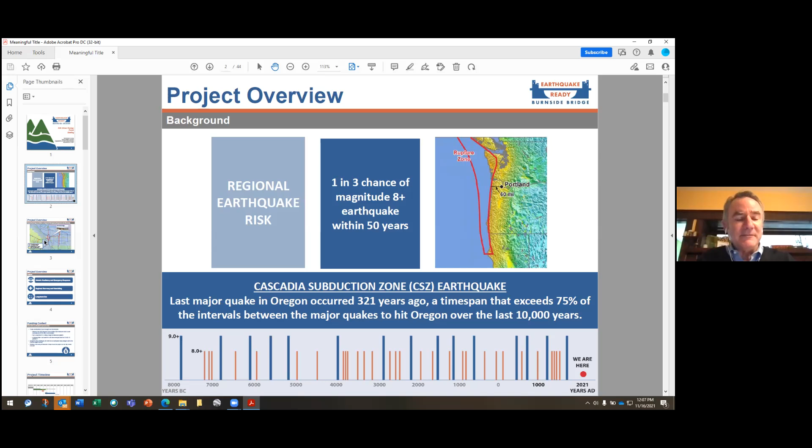If you think about Burnside, the road, not just the bridge, it starts all the way in Gresham, and then it's one of the few roads that connects to a Willamette River Bridge that goes over the hills. So if you follow it west, you'll eventually get to Washington County, where it becomes Barnes Road. So lifeline roads are typically really long roads that we can rely on in a big earthquake.

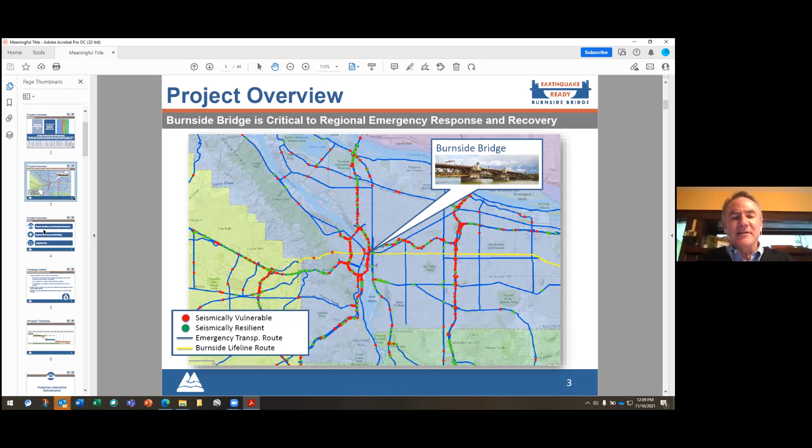So as the county finished replacing our previously most structurally deficient bridge, the Sellwood, we sort of pivoted to our 4 downtown bridges, and with the county commissioners' support, decided to take on Burnside because it's on a lifeline route and make it the next bridge that we can say is earthquake ready.

Next slide, please. So 3 main purposes of the project. The day of the big earthquake, we want the Burnside Bridge to be usable that day when the shaking stops. So some people ask, oh, what about the Tilikum Crossing? And it's true that the Tilikum Crossing bridge structure is built to be in use after a big earthquake. Unfortunately, the approaches to that bridge, TriMet needed to find some cost savings when they were funding the Orange Line, and they are expecting some settlement of the roads that approach the bridge, which are built on formerly kind of marshy land. So it might be weeks before the Tilikum is back in business after a big earthquake, and then it has freeway ramps above the MAX tracks as you get over to the west side around River Place.

After that big earthquake, we want to have a bridge that can help our region recover and rebuild. And I oftentimes use the New Orleans comparison after Hurricane Katrina for this point. The region around New Orleans lost about 1/3 of its jobs, about 1/3 of its residents after Katrina. And I think it's just around now starting to get back to its former population. So we don't want to have that happen to Portland in our region.

The last point there is sort of the one I mentioned earlier. If we're fortunate and the earthquake happens long after we're all dead and gone, which it could, we also want to make sure that we have a Burnside Bridge that is going to last another 100 years. The current bridge, even though we've done some maintenance on it in recent years, is not going to last another 100 years on its own. So we think it's a prime candidate for a major investment. Next slide, please.

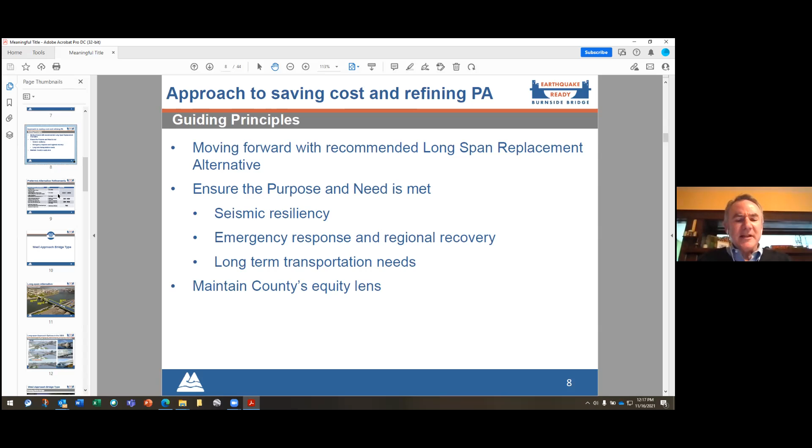We have been asked, why are you building a bridge that we have to stop for so a ship can pass? We did look at one that would be high enough that ships could go underneath it, but we were told by the Coast Guard it would have to be so tall that you'd enter the bridge around 10th Avenue on either side, sort of like around Powell's Books. So Steve will be walking you through some of those issues on those two structure types.

The big one above, these are cost savings projected from $140 to $165 million. That comes from narrowing the width of the bridge. If you think about it, it's pretty logical. You can't really make a bridge shorter in this case. It touches down at MLK on the east, 2nd Avenue on the west. Can't make it shorter, but you can make it narrower.

And we were proposing a bridge that was considerably wider than what's out there today. I think around 26 feet wider, depends on where you take the measurement. So what's on the table now is a bridge that's about as wide as today's bridge, maybe 1 or 2 feet narrower. So Steve will walk you through some of the images of what that could look like.

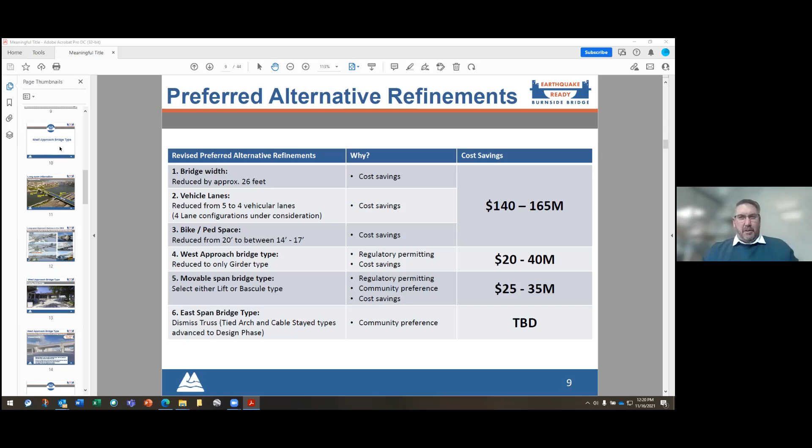And I'm going to work from west to east as we go through the visuals. And when we get to the concepts, the massing models, just remember they are just that, concepts and massing models, to help frame up the kind of bridge types that we're talking about for decisions now versus what's going to be made in the future during final design, of which there's going to be a lot more emphasis put into the urban design and aesthetics. But with that, I'm going to jump right in and, apologetically, I'm going to go fairly quickly so there's plenty of time for Q&A.

So as context, this is our 3 bridges in one graphic. As a reminder, the west approach, 450 feet, ties into downtown. The main movable span, about the same length at 450 feet, which has to provide navigation for vessels. And then a longer 650 foot or more east approach span. And that's what Mike was talking about as being deferred till the final design phase.

As we've been looking at structure types, we've been looking at this family of them. We actually started with more, but narrowed it down to this family. Tied arch, which is, again, classic arch shape, some modern versions on the right-hand side, a cable stay similar to Tilikum, different sort of style, and you can see the graphics of that. And then this girder option on the west approach.

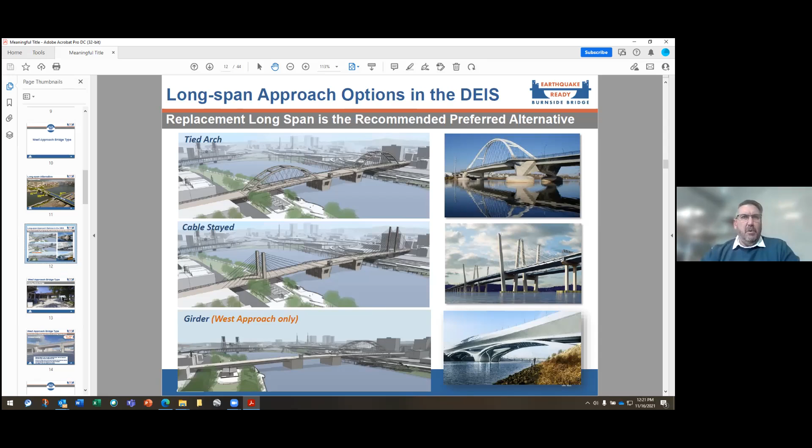And we're going to start with the conversation about what that means and why. And it's particular to the west approach because you don't have the same clearance issues that you have on the east side. So as we move to the west approach, pretty classic picture that most people recognize if you're standing on the south side of the bridge looking to the north in Waterfront Park. And the structure type here is a girder type, built in 1926, fairly deep members for such short spans compared to today's standards, and a whole series of different columns in Waterfront Park.

Well, the response that the project team has, and this was informed by the UDAG, the Urban Design and Aesthetics Working Group, is to replace the girder option with another girder option, thereby preserving the views up above, alignments with the historic district, while having a much longer span and actually gaining vertical clearance so that you can actually provide some opportunities for what could happen in and around the space below.

So this massing model is that, we're showing some haunching into the girders, a lot more work, we'll get into it from an aesthetic standpoint, but the concept of a longer but shallower girder span that preserves the open feel of Waterfront Park, both below and above, is what is going to be progressing forward. And the good news is it saves between $20 and $40 million compared to some of the other above deck superstructure types. So it sort of checks all the boxes.

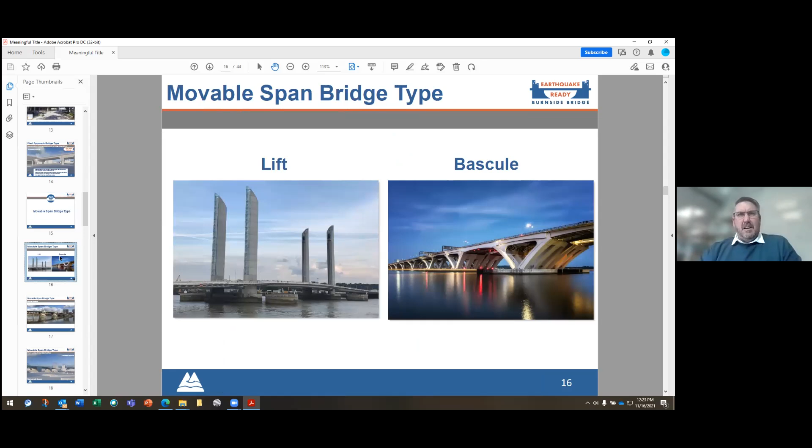When we talk about the movable span, lots of conversations about the movable span, different types, some modern versions of movable span. Left is the lift bridge and the right is the bascule bridge. You've seen different versions of lift and bascule if you just look up and down the river out there right now. But these are two modern versions of those styles. When you think about the existing condition, it is this bascule style, historic bascule style.

And so as we were getting into the conversations with different massing models, we did these combinations of a girder option on the west side, and we'll go through 4 different graphics of what the movable span could be. This again is the bascule option. There's nothing above the deck, so it's just a rotating movable span, and then coupled with a tied arch on the east side.

So as we were looking at this, we said, okay, let's start with this conceptual rendering of the massing model. Then what if we were to replace the bascule span with a lift span where it just raises vertically up? And you can see just in the massing model, the significance of the towers in the river. And those towers are sized appropriately. When you think about what has to be inside of them, it's all the mechanical, electrical equipment, plus the counterweight that fits inside of each one of these towers. So they're not small towers.

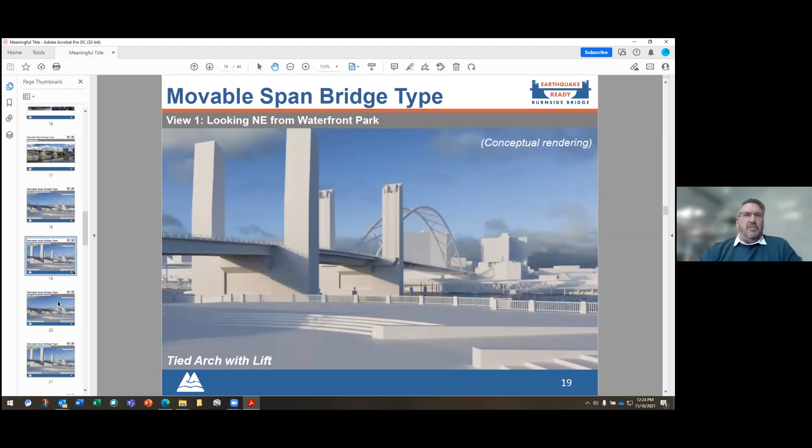And so then we said, okay, let's do the same assessment with the cable stay on the far east side. Again, girder on the west, bascule in the middle, cable stay with or without a different lifting structure. And again, here, from a compatibility standpoint, you at least start to get some similarities with the towers, but still pretty large masses in the middle of the river.

And so as we approach this question, we continue to develop the views for the way this could look. And so we have a couple of different viewpoints with different graphics. This case, it's on the bridge itself. You can see Big Pink, obviously, to the west. So these series of views are going to be exactly like that. So if you were to be on the bridge with tied arch and cable supported with the bascule, you'll see very little above the deck. Whereas when you introduce the lift option, you start seeing the towers.

As we move to a different place, and granted this view, unless you're sitting in the backseat of the car looking backwards, you're not necessarily going to have this view, but it's reminiscent of if you're on the East Bank Esplanade and looking in this direction as well.

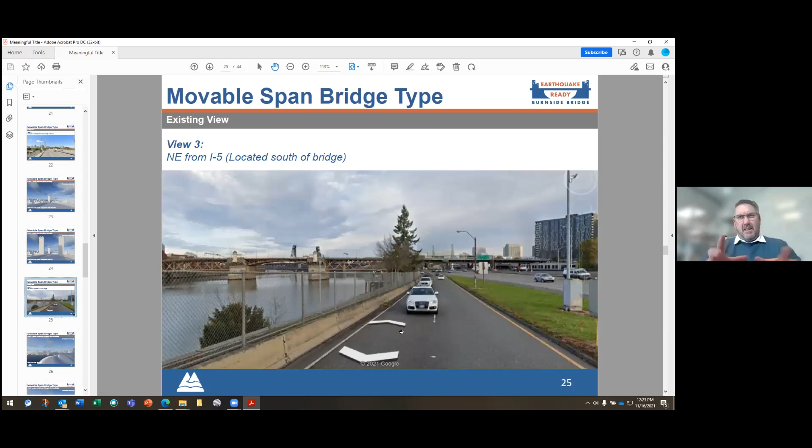So looking north from the south side of the bridge, you would see now this combination of the tied arch with the bascule with a girder option compared to how that might look as you start introducing these vertical elements with the lift. And you can see the difference as you modify the long span on the east approach to something more like a cable stay. And I'll go back and forth to reference the difference between these two.

Some definite differences in terms of the scale and how lightweight the superstructure looks, especially for the long span. Then when you start adding back in the lift option from the movable span, that mass is reintroduced.

We then said, okay, let's get back on the bridge. In this case, you're standing on the west side looking east. This is a classic place where people, you can even see in the Google Earth, standing there to get a picture of the Portland, Oregon sign. And so this is a location that a lot of people will naturally move to.

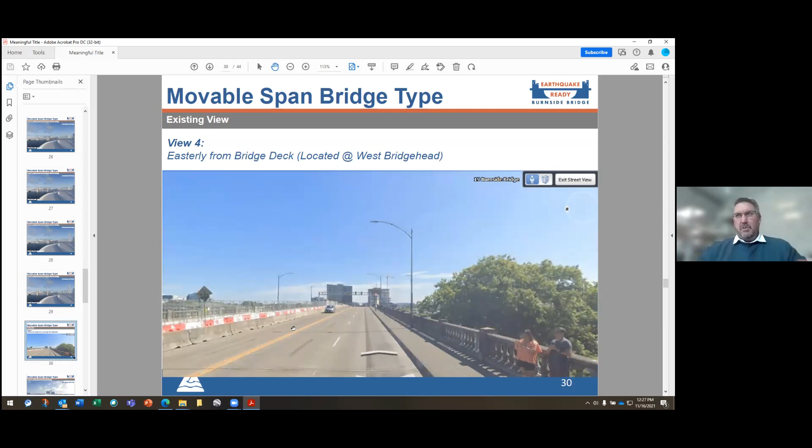And so when you start thinking about the different bridge options, again, bascule with the tied arch in the distance versus the tied arch and the lift, versus the bascule and the cable stay in the distance. Again, the towers get taller, but you don't have that same sort of massing on the outsides, versus the cable stay with the lift.

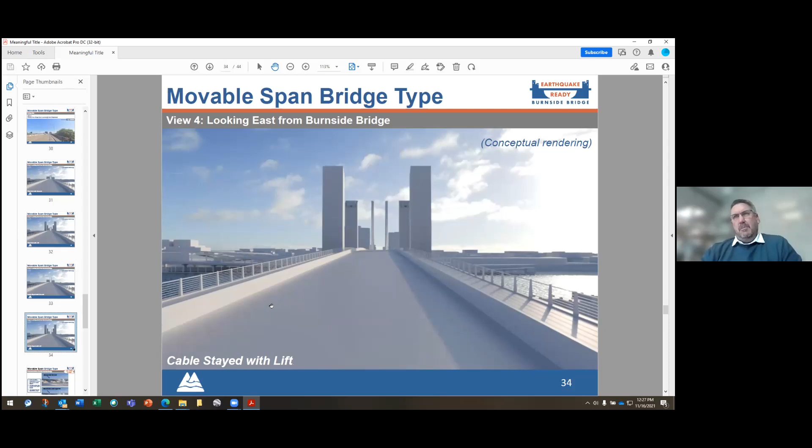So one of the things that we found clearly in all these graphics is the introduction of the lift movable span creates a mass that when we started asking this question to many groups, whether it's the Urban Design and Aesthetics Working Group, permitting agencies, the general public, it was pretty unanimous that, given all of the pros and cons, having a bascule option, that option that doesn't have anything above the deck, made the most sense. From a cost standpoint, it also cost between $25 and $35 million less.

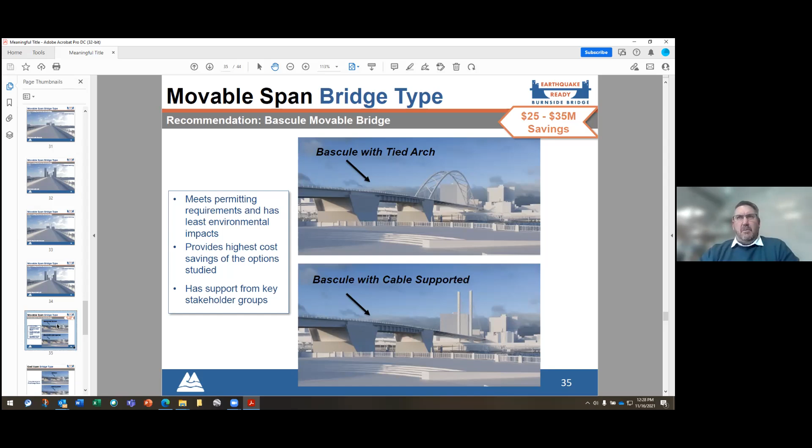So moving forward with this bascule movable bridge in combination with something on the east side to be determined in the final design phase. And this goes back to Mike's point of the complexities and challenges with building, whether it's a tied arch or a cable stay, over the freeway, over the railroad, over the East Bank Esplanade, over the river, is really something that before the county commits to one type or another, wants to get contractor input. The actual contractors would build the bridge. And so these two options are both being deferred into the final design phase for the ultimate selection, which is expected to happen sometime in early 2023.

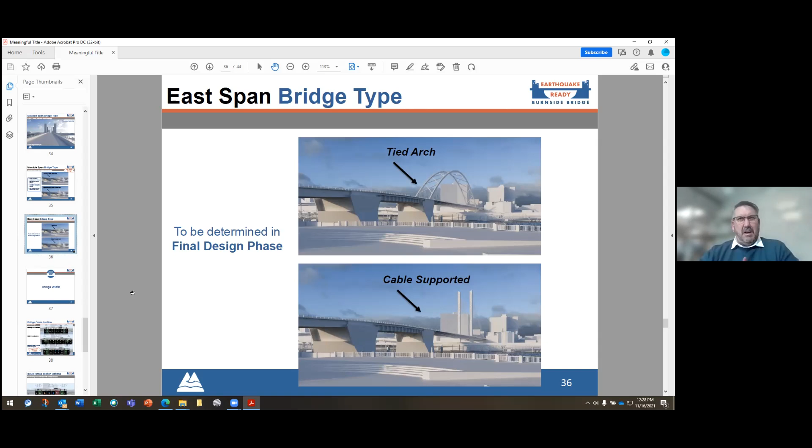So moving into bridge width, this is where Mike mentioned the granddaddy of all the cost savings really is about the width of the bridge. Just like to his point, hard to reduce the bridge length without a lot of problems. So the cost savings comes in how do you assess space and how do you create space on the bridge itself.

So this series of cascading cross sections is a comparison of the existing cross section that's out there today, the original DEIS cross section that if money was no object would be the option going forward. Unfortunately, money is an object, and therefore this refined cross section was assessed to lead to what's coming out as the updated preferred alternative with a narrower cross section.

And so in comparison, this narrower cross section reduces the bike ped space from just over 20 feet to somewhere between 14 and 17 feet, which the lower bound of that bike ped space in each direction is the Tilikum width at 14, could be upwards of 17, but that has a direct effect on what the roadway width inside could be. And so there's some variable dimensions to the roadway width as well that responds to an affordable bridge cross section.

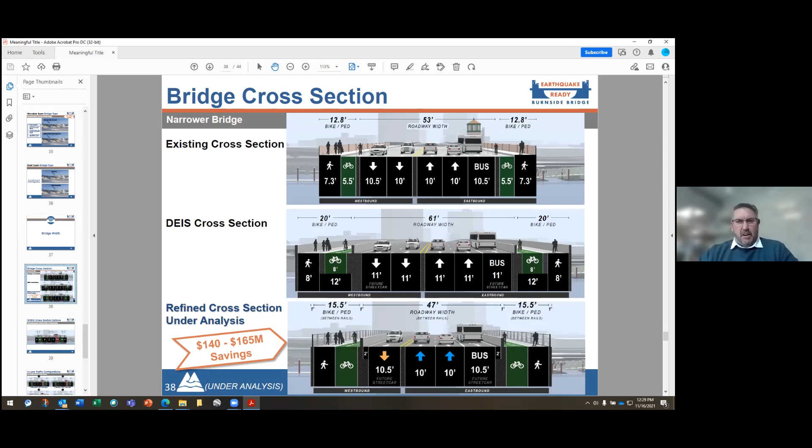And so the best way to show that is really this graphic that shows that with a 14-foot space on the outsides, you could have up to a 50-foot space for roadway width. If you allocated 17 feet to the outsides, the roadway width inside could be reduced down to 44 feet. And there's different impacts to what that could mean to shoulders primarily, and maybe the bridge lane dimensions themselves. In all cases, for the roadway width, it was a reduction from 5 lanes down to 4.

And so as we asked ourselves, what can you do with 4 lanes? This is where we start to get to a lot of cross sections. There are really 4 different options on how to handle traffic within the 4 lanes. And that's what this graphic is really intended to show. And the trick to this graphic is look at the colored arrows. Everything else is details, but if you look at the colored arrows, you'll notice the difference between the traffic lane

configuration. So number 1 is 2 westbound lanes, 1 eastbound lane, and a bus only lane. So anytime you see in these graphics the rose lane color, you'll see a dedicated bus only lane. Number 2 is swap it so that there's only 1 permanent westbound lane, 2 permanent eastbound lanes, and the bus only.

Number 3 is really the option of a reversible lane. So at peak times in the morning, you would have 2 westbound lanes shown by the 2 arrows in orange. At peak times in the evening, and frankly, the rest of the day, you would have 2 dedicated eastbound lanes and then the bus lane going eastbound as well. And so that's a response to when you have the most vehicles crossing the bridge, and how best can you accommodate the lanes to match a bridge width that's fixed.

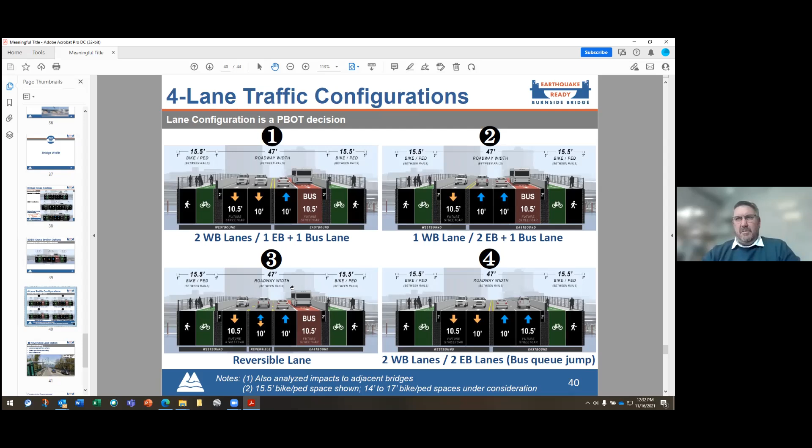Number 4 itself, while it looks great on this cross section, 2 lanes in each direction, really the problem with it comes at the ends of the bridge. There's an assumption that you would have a bus queue jump, so basically a short bus only lane at the very ends of the bridge that buses could sneak into and get around all the queued traffic at the intersections at the ends. Unfortunately, you'd have to have really quite a long bus queue jump lane to the point where it's actually reducing the benefit of the narrower bridge width, the cost savings that we're going for.

So from a cost standpoint, that reversible lane is something that's very intriguing. It maximizes the use of space and ties it to the traffic when you need it. So we're studying based on other projects, what lessons learned have we seen? This is a graphic of a reversible lane on a bridge in Vancouver, BC. So how does it perform? What are the key entry treatments to make sure it's safe as people get onto the bridge? And how do you make sure that traffic operations and safety are maintained?

That's really a function of these lights. I don't know if you can see them very well in this picture, but there's a little green, a little red X, a little red X. Tells you as you're moving one direction, which lane you should be in versus the lanes that are closed with the red X's. So we're also studying what would it mean to have more overhead signage and even possibly gates to help direct people in the right lane before you ever get onto the bridge itself.

So lots of work is going into the study of this reversible lane, which really doesn't exist in Oregon. It happens in other states like Washington, California, but we don't have a prime example of that here.

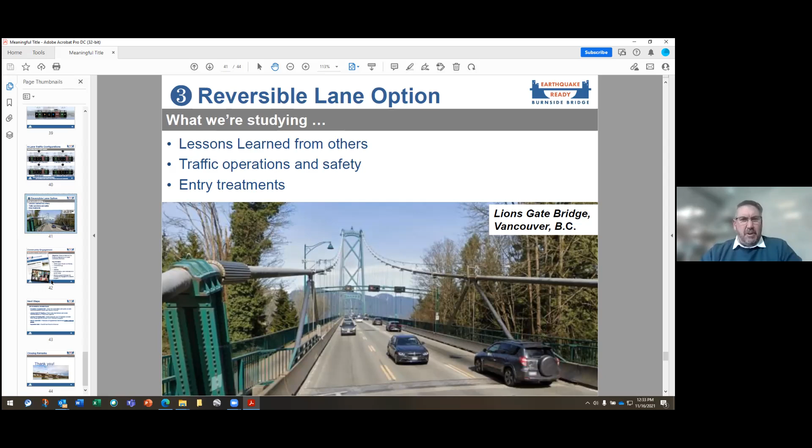So with that, apologize about going so fast, but I want to hand it over to Mike for the last couple of slides before we take questions. Thank you, Steve, and thanks for covering that so quickly. I'll try to go quickly. Just have a couple more slides.

Today, we're actually launching an online open house to get input on the same things we're sharing with you today. That's at burnsidebridge.org. And there's a link there to our online open house and a video that with motion shows what Steve's been sharing. So we've got that happening for the next month, doing a lot of these briefings like today, doing a webinar in early December. We have information on that on the website too. If people want to spend more time with us and ask us questions at that setting, that's coming up on a weeknight in early December.

Sending out our news release and e-newsletter and social media posts today. We also work a lot with our non-English speaking communities and other minority communities with a team we call the Community Engagement Liaisons. Next slide, please.

So this is sort of where we're headed next. We're doing this round of outreach on these cost-saving ideas. And then in January, we'll gather our community task force, which is a group of 20 citizens that provide input for us. And we have had input from another group that Steve mentioned called the Urban Design and Aesthetics Working Group that includes, I think, about 5 architects, including Bob Hastings, Patty Tillett, Carol Mayer Reed, Brian Kimura. So you might recognize some of those names. Anyway, they've weighed in also on some of these items.

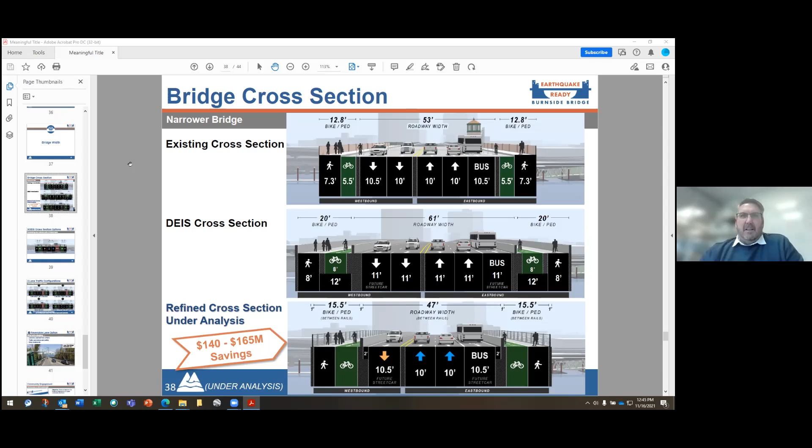That's exactly right. So 25 is by intention less than today. And with that commitment to a crash-worthy barrier, we reduced that width down to a foot with a special design in order to have a minimum width. The other question was about the directionality of the bus-only lane, and it ties back to the number of lanes. With only 4 lanes and the existing eastbound bus-only lane, based on feedback from TriMet, maintaining that eastbound bus-only lane is exactly that, vital.

So that becomes one of the requirements. In looking at a westbound bus-only lane with only 4 lanes, it comes with a compromise. It comes with either eliminating a westbound movement or only having one eastbound movement in which the volumes are the maximum. So this concept is only showing with 4 lanes, this eastbound bus-only lane, because of that reason.

There's also some other complications with how do you approach the bridge itself in the westbound direction with the bus-only lane. That can probably be solved over time through different projects with the city. But that's one of the byproducts of having the narrower 4 lane, is the likely inability to have a westbound bus only.

Okay. Quite a few questions here. They're piling up. But I think while we're still on the subject of pedestrian facilities and how they would perhaps integrate with pedestrian facilities on either end, and Patrick mentioned they were opposed to an elevator option. I'd like to hear a little bit more about the connections on each end and how they would play out there.

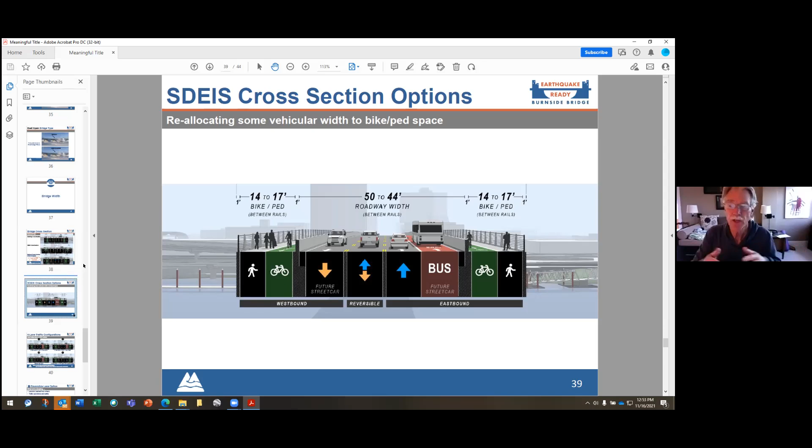Okay, thanks, Patrick. Couple of questions about the long-term configuration of Burnside on either end. I assume that's a city more than a county issue, but I guess we're assuming that the couplet on the east side remains with Couch. Any other thoughts about changes that might occur there that would affect the design of the bridge? Patrick, that might be a good one for you. Yeah, I think so.

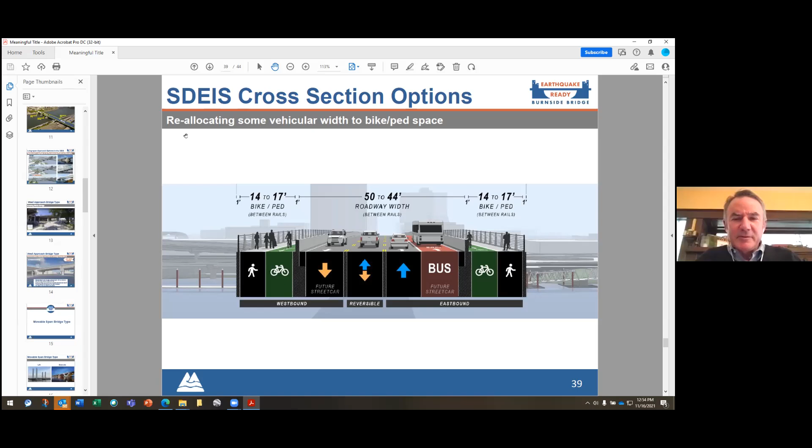Right now, I know of no plans to change the Burnside Couch couplet. There are plans underway to improve transit operations and reliability on Couch to get to the bridge. There's a transit priority project going; I don't know all the details because it's not my project, but it will help improve the transit travel times through the Couch corridor, because during the AM or PM peaks, it tends to get hung up in the traffic queues along Couch to get to the bridge. That project, if I'm not mistaken, is going to be done in 2022.

Sharon Dalio is on the call, my engineering colleague here at PBOT. Sharon, do I have it right on the implementation for the Couch project? Yep, it's next summer. And it would transition from 14th to 7th. Okay, there you go. That's going to be a new transit priority project on Couch to help the buses get through those AM and PM peaks.

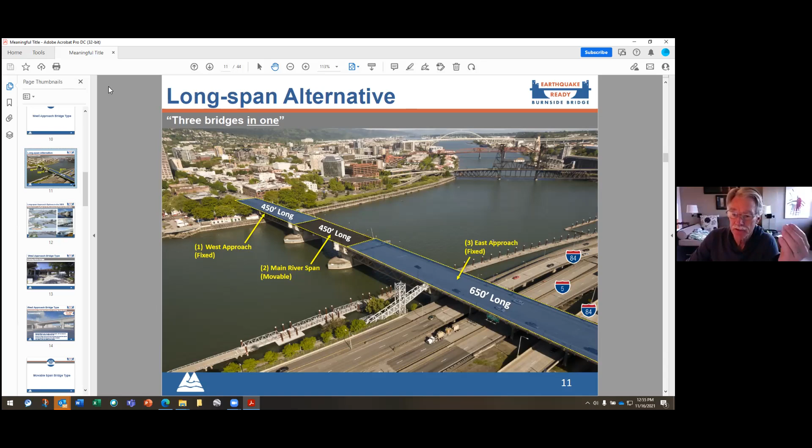Okay, let's shift over to a question from Sean: with the West Side girder option set, what are the opportunities to more fully express and integrate the existing park use below, Saturday Market, et cetera, into the design development of the bridge so that it's more than just a space below? The same can be said about the east side, where we have a skate park and some other things going on. So any ideas there? Okay, I'll start, and Steve might have additional comments.

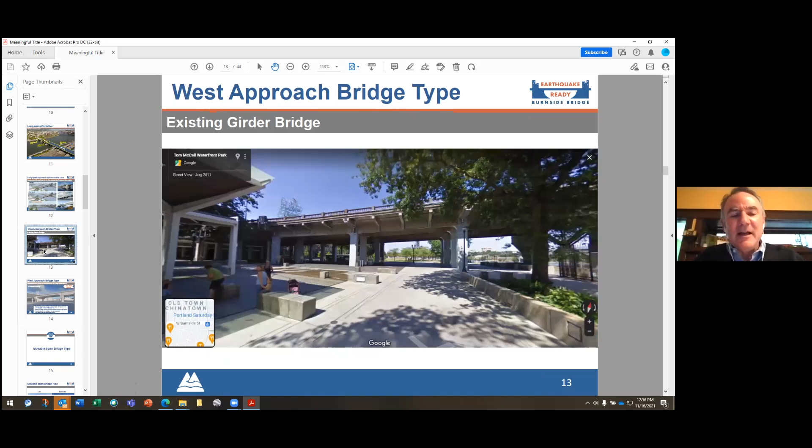So whoever asked the question's right. Saturday Market is a beloved local long-term cultural institution that sets up most Saturdays and Sundays of the year underneath the bridge. Their director is happy with this solution, which gives them a little more headroom. While somebody noted that the columns are bigger, those are important for making sure the bridge is usable after the earthquake. And there's a lot fewer columns than the current bridge, which has really a forest of skinny columns underneath. So Saturday Market's the main event that uses that space.

We have the Japanese American Historical Plaza to the north. That will be impacted during construction; it's not the columns, it's more that a little bit of the landscape mound work would be part of our work zone. And we'd make sure that it's in good shape when we finish the project.

And basically, I think you'd have a more open view of the river and the east side when you're walking underneath the bridge there. At the east end, someone mentioned Burnside Skate Park. They have a board of directors, believe it or not, and they have a representative on our task force. We've worked closely with them, and they actually have sort of the standing of a National Register of Historic Places structure, because they were really one of the first do-it-yourself constructed skate parks in the US.

And if we do this long span, which we're planning to do, this bridge type, it'll require a closure of the park during some phases of construction, but the park will be able to remain in largely its current form, minus the top of the old bridge.

Okay, we have, I think, time for at least one more question. There's a question here about the National Historic Landmark status and the presumed delisting of the bridge and how that timeline works with the mitigation process long-term. Steve, do you want to take this one?

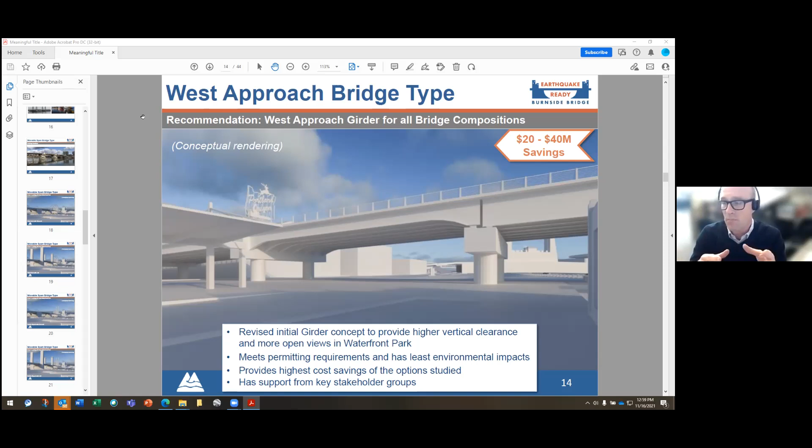Any last thoughts? But I had just thrown in one question about where we are in the timeline. So you talked about a design build process, and I guess all of us are wondering, how much design is left in your process? So can you give us a 15-second sense of, is it those round columns with those square beams, or is there design left here? There's a ton of design left. It starts in 2022 after we finish this phase and hire the design firm.

Okay, and would you just very quickly say whether you anticipate a design build approach to hitting a guaranteed maximum price as driving the boat versus aesthetics, or will aesthetics and connectivity to the cityscape play a role in balancing the cost decisions? It won't be design build. It's likely going to be construction manager, general contractor, or CMGC. And we know that aesthetics are very important. It's the heart of the city. The Burnside Bridge and the Willamette River are the center of our grid city and regional grid, streetscape. So we're going to pay attention to aesthetics.